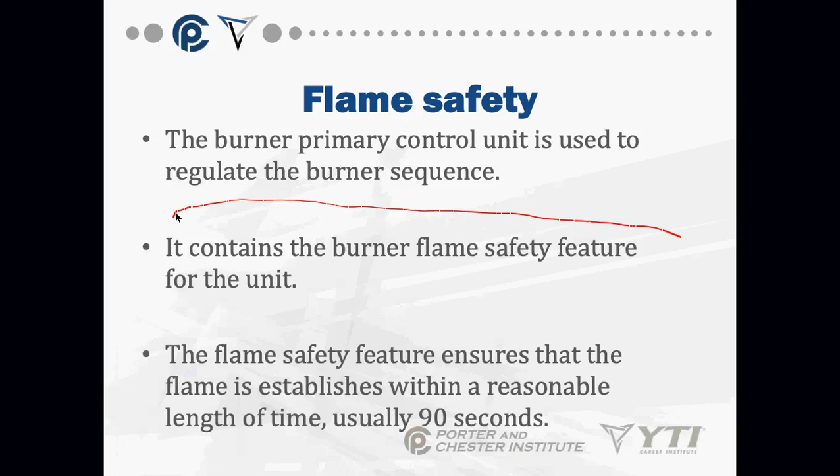But primarily, that's its operating control side—it does the sequence of operation. Now on the other end of it, we have a burner flame safety feature. The flame safety feature ensures that the flame establishes within a reasonable length of time.

Usually that's 90 seconds in the older controls. Watch this—they've now come down, in the newer controls, as far as 30 seconds. From the point that control thinks it's supposed to have flame, it has now come down to could be only 30 seconds. We call that the trial period.

So in one unit, in one little box, and I showed you the box on our call on Thursday, we have our operating control, which is the sequencing, and we have our safety control. It senses the flame.

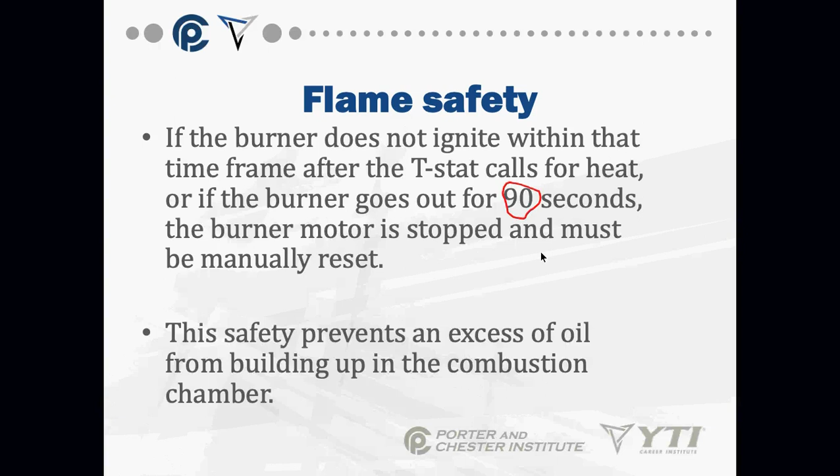If the burner doesn't ignite within the time frame after the thermostat calls for heat, or if the burner goes out for however long, 90 seconds is the max, the burner motor is stopped and the control has to be manually reset. The whole idea is that we don't have an excess of oil building up in the combustion chamber. Every time the oil burner starts with no flame, I'm spraying unused oil into that combustion chamber. If it's 90 seconds, I'm spraying 90 seconds of oil into that combustion chamber. It may not sound like a lot, but if it starts up after you've done this 5 or 6 times, it's going to be a big bang with lots of smoke. So we don't want unburned fuel building up.

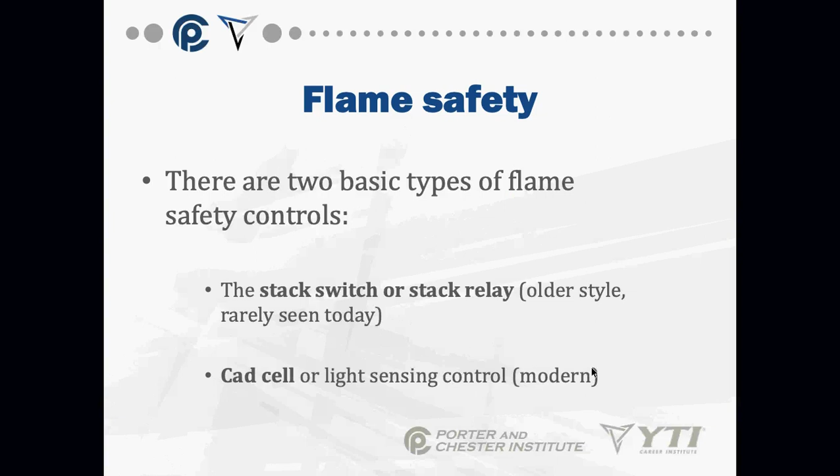We have two types of flame safety controls: the stack switch, or the stack relay. Folks, the only reason I still cover stack switch and stack relay in this course is it's on the oil burner licensing exams in both Massachusetts and Connecticut. I don't think I have any Pennsylvania on this call, but it's on the licensing exam in both Connecticut and Massachusetts.

They still talk about the stack switch, so just be very aware of this—you might come across them. You can no longer install them, and we replace them with the Cad Cell whenever we possibly can.

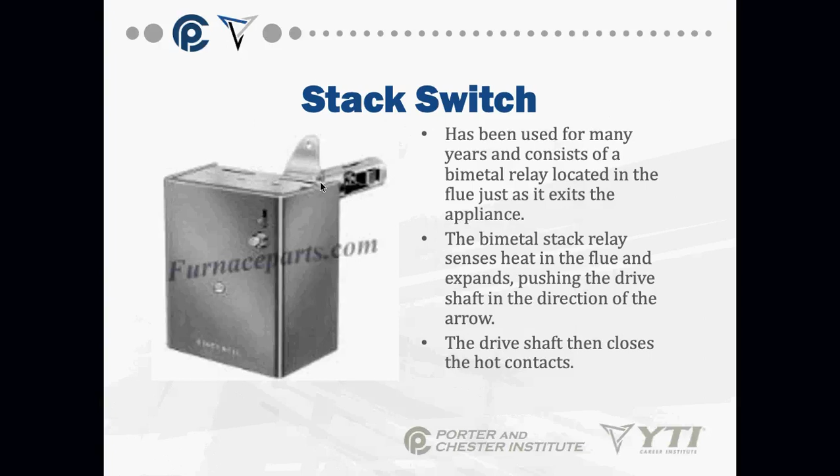The stack switch is an older style control. It looks like this. The stack switch is mounted on the furnace exhaust, the stack. This side here that I'm circling is outside of the stack—it's in the room air. It has a reset button on it, and a little lever on it.

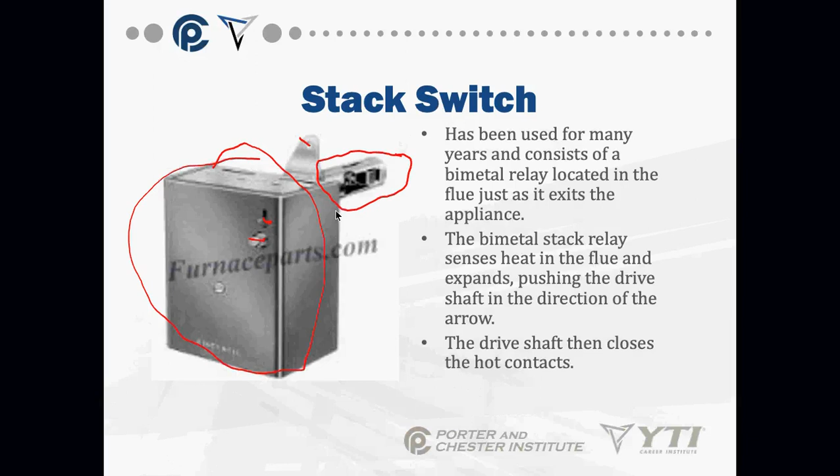And this part in the back here is what's in the flue pipe, mounted by screws right there, and there's one down further as well. It has been in use for many years—this was the first automated control we had on oil furnaces.

When they first started blowing up in New York City because of unburned oil, they decided to go with this automated control, and it works. It has a piece of bimetal in here. Bimetal is metal that expands and contracts based on heat. It senses the heat in the flue pipe and expands, pushing a drive shaft in. The shaft then closes the hot contacts—I'll show this to you on a diagram afterwards. So all this is a set of contacts with a bimetal switch in here.

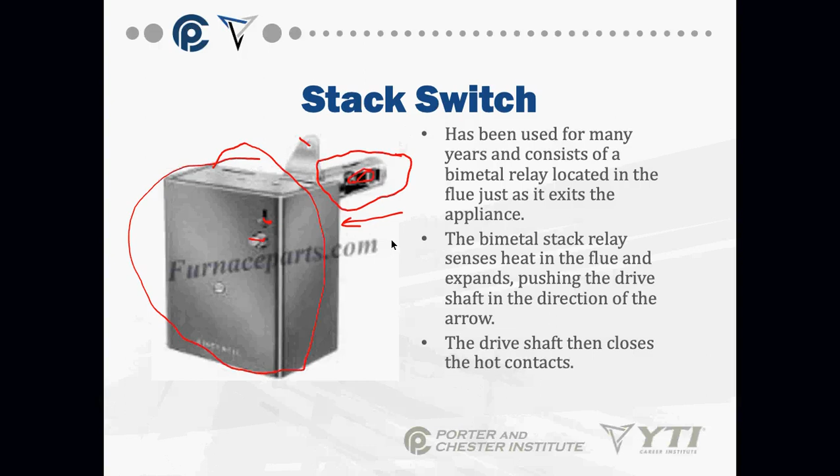If there's no ignition and consequently no heat, we have what's called a safety switch heater. Remember I talked about bypass when we were talking about circuits? If there's no ignition and no heat, there's a little heater in there that remains in the circuit and it's not bypassed. This heater heats up and opens a safety switch based on the heat, and it shuts everything down. To start the cycle again, you must manually shut off the system, depress the reset button, and it starts all over again.

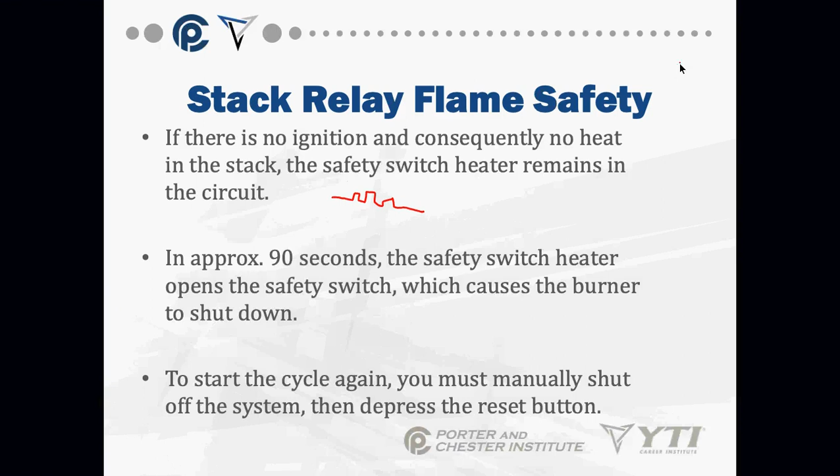Now, is the stack switch a very fast safety, or is it a slow safety in the grand scheme of things? It's slower, and it's designed to be slower because I have to have heat in the stack, in the output of the furnace, in the exhaust, before I can even sense that there's flame. It's a slower safety.

Which is part of the reason it's going away—it's not accurate enough for the newer burners. Also, a lot of the newer equipment doesn't necessarily have such a high stack temperature. Think about it: heat going up the chimney is wasted heat. It could be coming into the house and heating the house instead. So we keep our stack temperatures lower now.

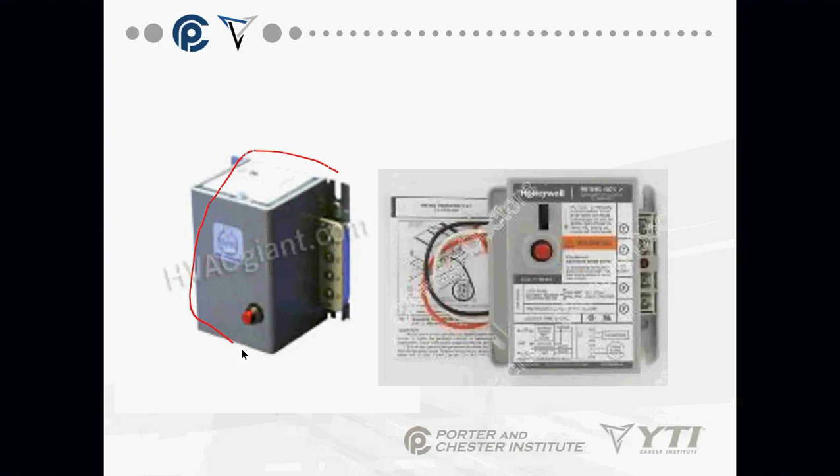Our other type of safety is the Cad Cell Relay—the Cad Cell primary control. It looks like that, or it could look like the black one that I showed you on the screen the other day. These are all different types. It's flat and mounted onto the burner assembly itself, usually on the right side of the burner where the wiring compartment is, and everything connects into this.

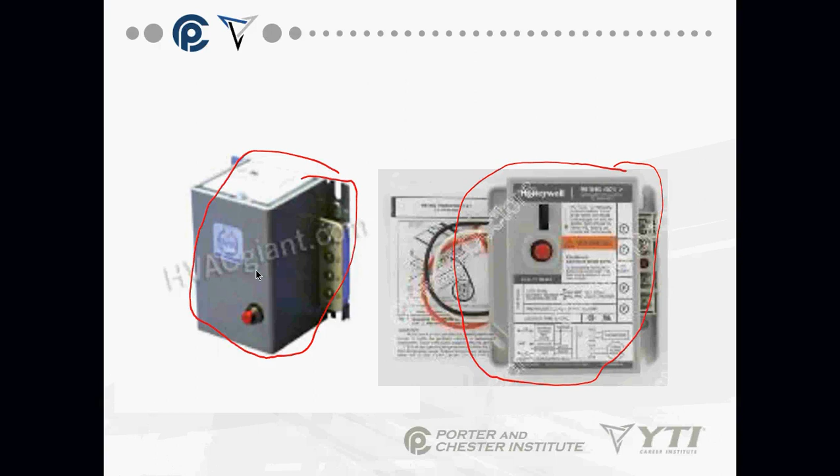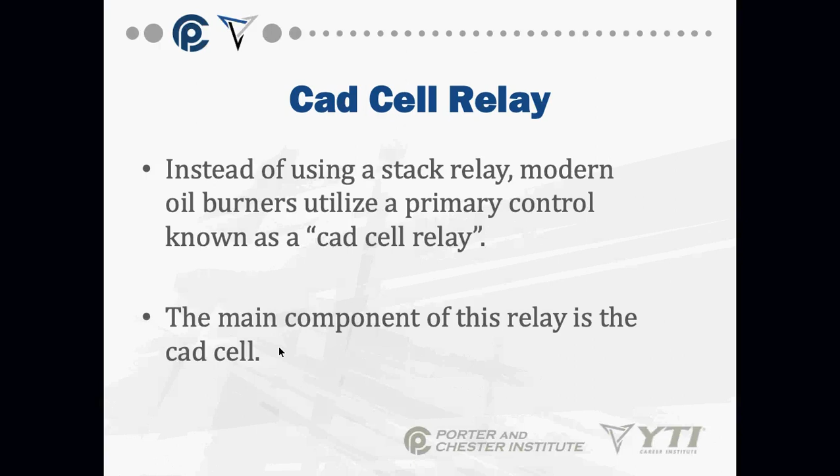The Cad Cell Relay, instead of using the stack relay, it's called a Cad Cell. The main component of this relay is the Cad Cell itself—everything else is based on it. The Cad Cell is made from a chemical compound called cadmium sulfide, and it's a substance that changes its resistance when exposed to light.

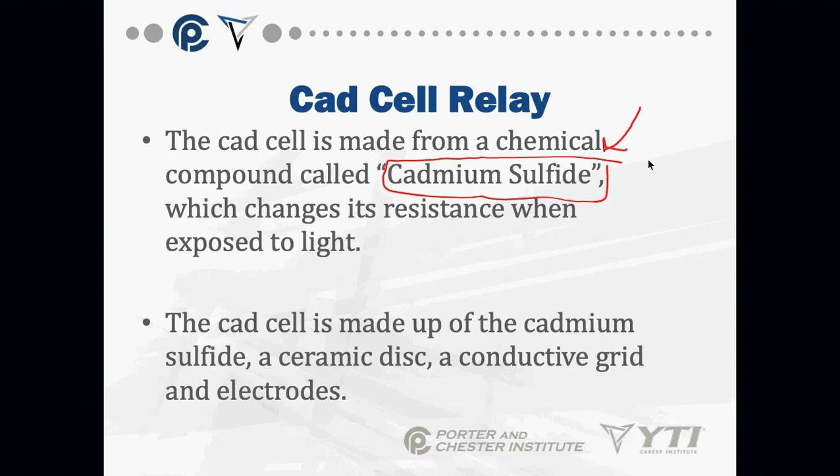This is actually mounted inside the burner tube, aimed down the tube towards the flame, so until there's flame, it sits in the dark. It's made up of a combination of cadmium sulfide, a small ceramic disc, and a conductive grid and electrodes. You don't break these things apart—I don't care what's inside it, but I do need you to know what it's made out of. Again, it changes resistance when exposed to light.

The Cad Cell has to be positioned in the oil burner so it can sense the light produced by the flame. It looks down the tube from the control side, usually mounted on the underside of the transformer, so that when the transformer's on top of the igniters, the Cad Cell looks down the tube towards the flame. The only light it's supposed to see is the light produced by the flame.

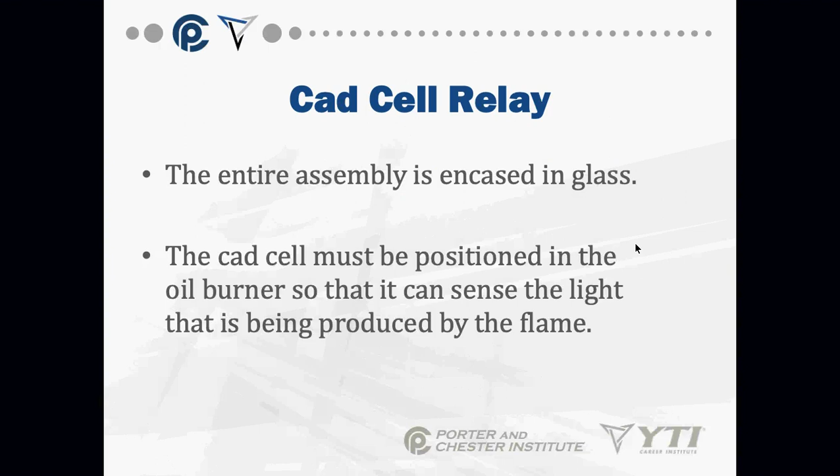When the oil burner's off, there's no light being generated, so the resistance of the Cad Cell is very high—about 100,000 ohms, and it's very possible your meter could read OL. If you take the resistance across a Cad Cell in the dark, your meter might read 100,000 ohms or close to it, or read OL. When the burner is firing and the Cad Cell sees light, the resistance drops down to under 1,000 ohms.

When you're testing a Cad Cell, this is exactly what you're testing. Cad Cells go bad over time—they only last about 3 to 4 years. They do wear out, and you've got to be able to test them and make sure they're still good. It's a source of service calls.

Now, remember I talked about the bypass circuit again—you have a heater in here that's actually going to pop a safety switch open. That heater heats up as long as the Cad Cell is in the dark. I have the Cad Cell here, which is basically a variable resistor.

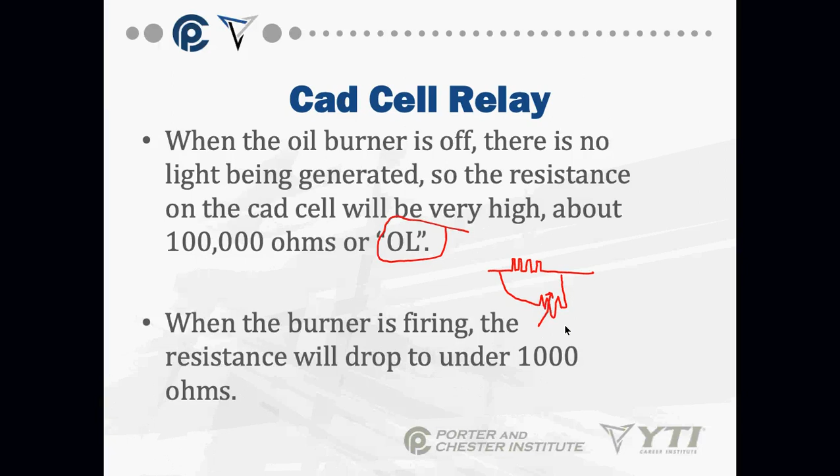Okay, pardon my drawing of a variable resistor, but it's a resistor with an arrow through it. When that Cad cell drops its resistance, it's actually a lower resistance than that heater, so we won't pop the safety switch that's being heated up by that heater. So we have a situation—this is a use of a bypass circuit. Everyone was wondering why I was so insistent we talked about bypass circuits. This is why. The voltage is going to take the path of least resistance in this control.

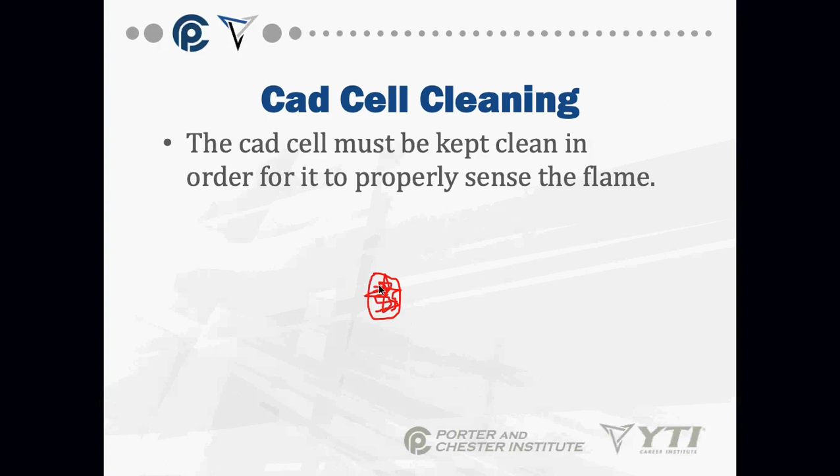Cad cells have to be clean. So if we have a lot of soot in the furnace, you have that Cad cell eye. If I'm looking straight at the Cad cell, we have resistance, we have some grids in here. You can look at the eye and you'll be able to see that. If this is all sooted up to the point it can't see the flame anymore, or it's a very dim flame, the Cad cell isn't going to work. So we want to be able to see the eye of the Cad cell. This is basically what it looks like.

We have two electrodes that provide our connectivity. We have a conductive grid, and we have the cadmium sulfide. When I put a meter across the back part of this, the two pins that are coming out of it, if my Cad cell is in the dark, or if I have it covered with a piece of electrical tape, my meter is going to read OL, or it's going to read very close to 100,000 ohms. No current is going to pass through that—it's all going to go through the heater.

Now, if I put this in the light, that number will change to a number under 1,000 ohms—it comes pretty far under 1,000 ohms. So again, Cad cell in the light, low resistance. Cad cell in the dark, very high resistance. You have to remember that. That's a memorization thing. Got to remember this. Any questions on that? No, sir. Nope. Okay.

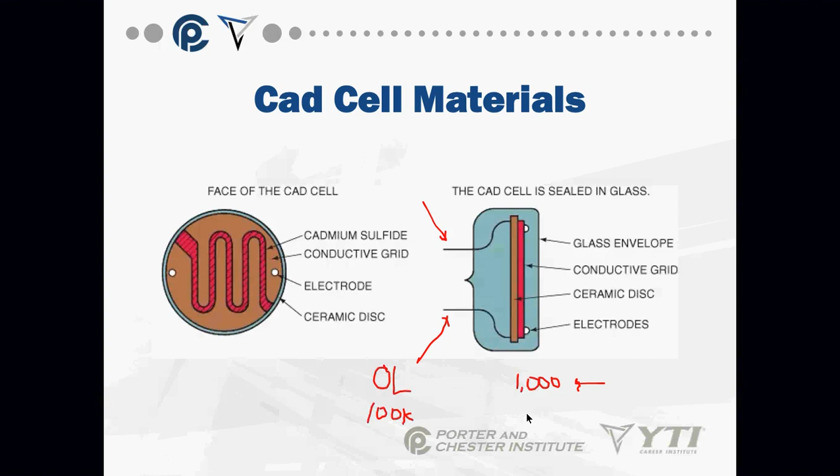So when we look at an oil burner, sometimes you have the Cad cell mounted on the back of the burner here, almost directly under the transformer. Sometimes it's actually mounted on the bottom of the transformer looking down here. The whole purpose of the Cad cell position is that it has to be able to stare down this burner tube, and it has to be able to see the flame.

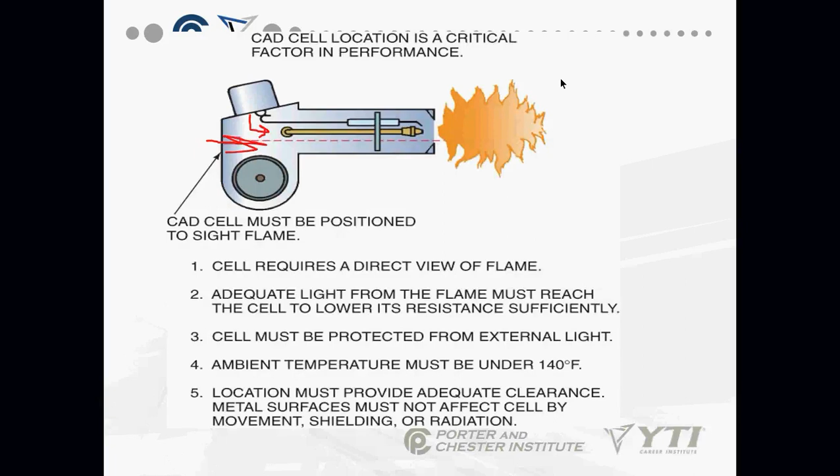The cell has to be protected from external light. When you have an oil furnace, anything that this burner's in has to be completely dark—no external light. This area has to be sealed. There's gaskets around here. No external light. Everything around this has to be sealed.

This Cad cell cannot be heated over 140 degrees, so again, this burner has to be throwing sufficient air down this tube to keep that Cad cell cool. It has to be away from metal so that we can't have movement. We can't have shielding from the light, and we can't have any infrared radiation hitting this Cad cell. It has to be able to see the light but not be affected by the heat. Placement of this Cad cell is extremely important.

Again, these things fall loose over time. There's a little bit of vibration in all oil equipment. Things get loose.

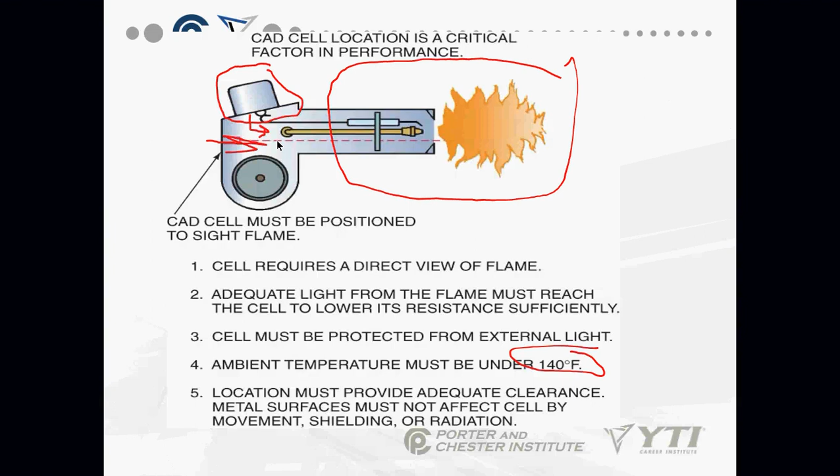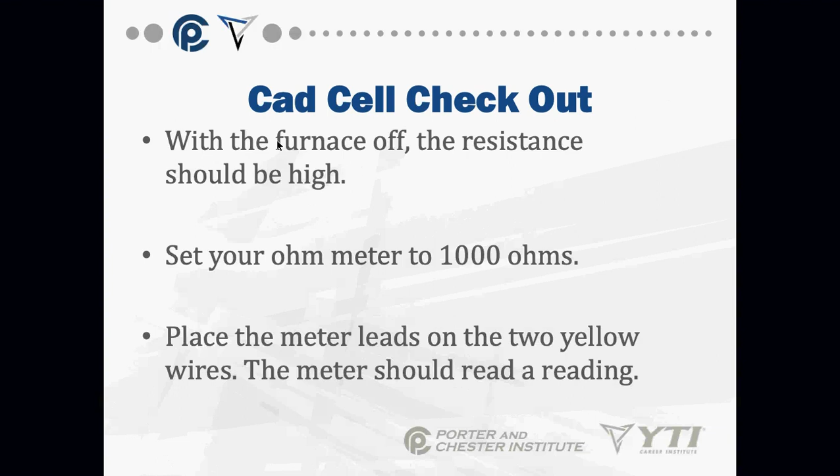With the furnace off, we take the two leads off the Cad cell, and I'll show you where it's connected. We take the resistance—the ohm meter should take a reading way over 100,000 ohms. You don't have to worry about this step anymore; this was before we had auto-ranging meters. You used to have a different scale. Your meter's all auto range now, but we wanted to set our meters for the 1K ohm scale. You don't have to worry about that step anymore.

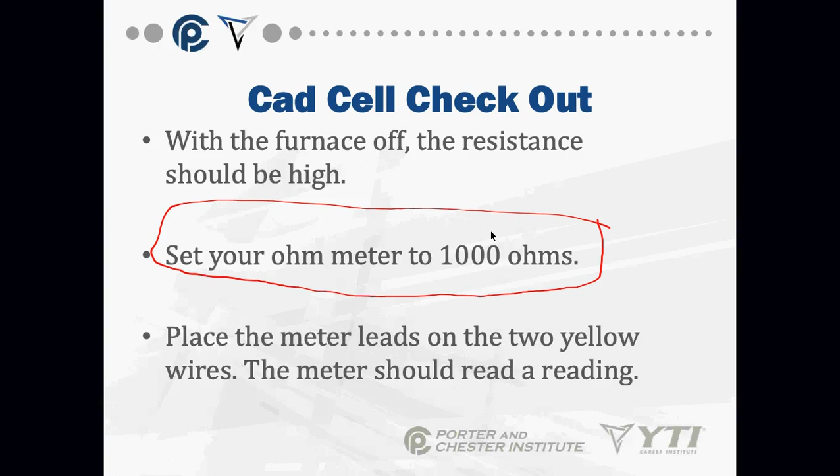You place the meter leads on the two yellow wires. The meter should read a reading. Now, we jump out the T and T terminals, and I'll show you where that is—that's basically where your thermostat connects into.

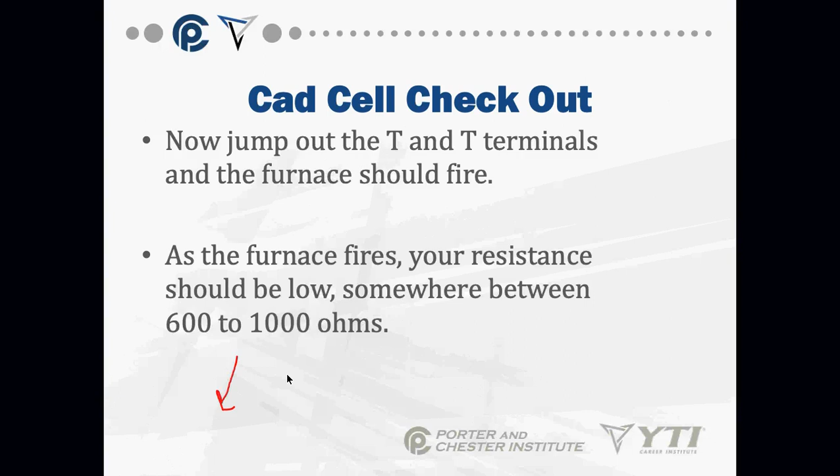The furnace should start up. After the furnace fires, the resistance should be low, somewhere between 600 to 1,000 ohms. Quite honestly, most often now it falls under that. But anywhere from 600 to 1,000 ohms or lower, you're fine. That CAD cell is perfect.

If the CAD cell is good, the CAD cell is good if all of this happens. If it doesn't happen, replace it. You can't fix a CAD cell. The CAD cell is preferred over the internal stack switch. It acts faster, has no mechanical moving parts, and is much more dependable.

Okay, so CAD cell is what we're using. It senses light. As it senses light, the resistance drops. It's a stupid little $2.50 part that is the heart of the entire oil safety controls on every single furnace.

Okay, I want to talk one more about it, but it's going to be on a separate PowerPoint. So just give me a second and I'll switch over. Any questions on what I've covered already? No, sir. Okay.

This is the picture of the CAD cell that's actually mounted on the bottom of the oil furnace. Okay, didn't want that.

You see that this is my transformer. We have the springs of the transformer, and then we have the CAD cell positioned between the two springs of the transformer. This CAD cell, where it's mounted, actually slides in and out. This whole CAD cell assembly will slide out. You don't have to take any screws off or anything like that. It slides out.

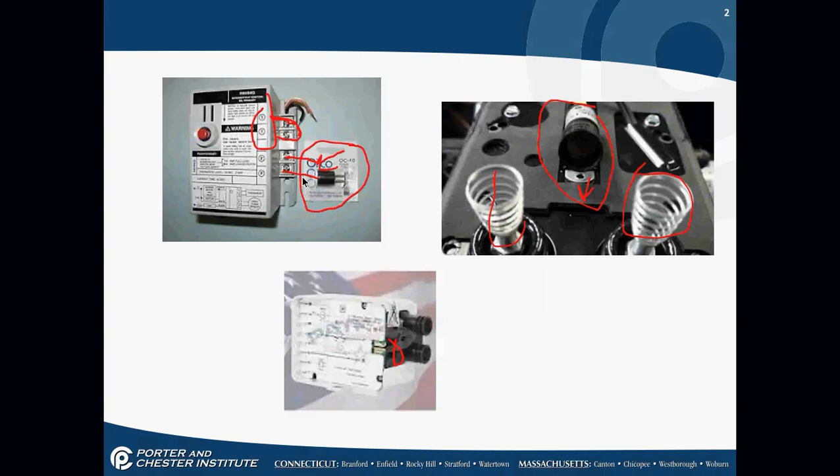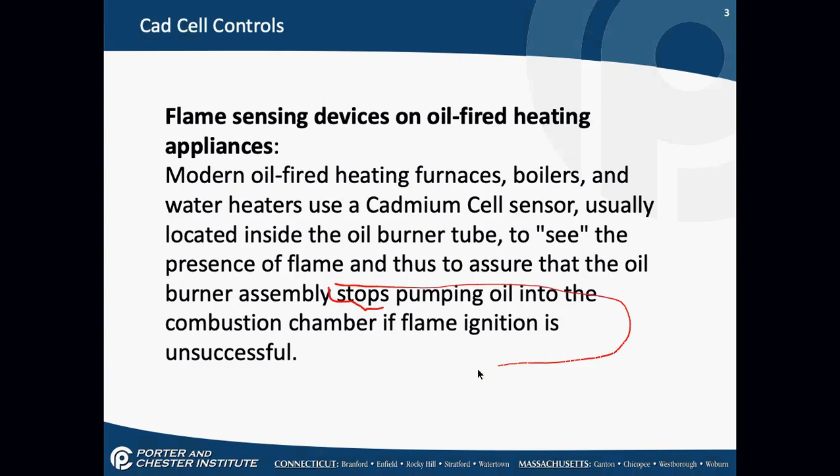Okay, so again, it's a flame sensing device. We've already gone over this. Again, it has to be able to see, through the tube, the presence of flame. It stops pumping oil into the combustion chamber. I've said it twice now. It's pretty important - it's got to stop pumping oil into the combustion chamber if the flame goes out.

Okay, yellow wires, that's the key. Yellow wires. Okay?

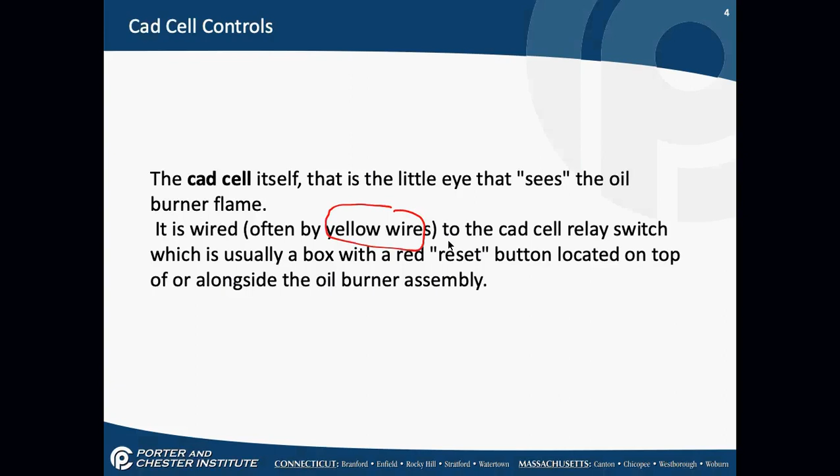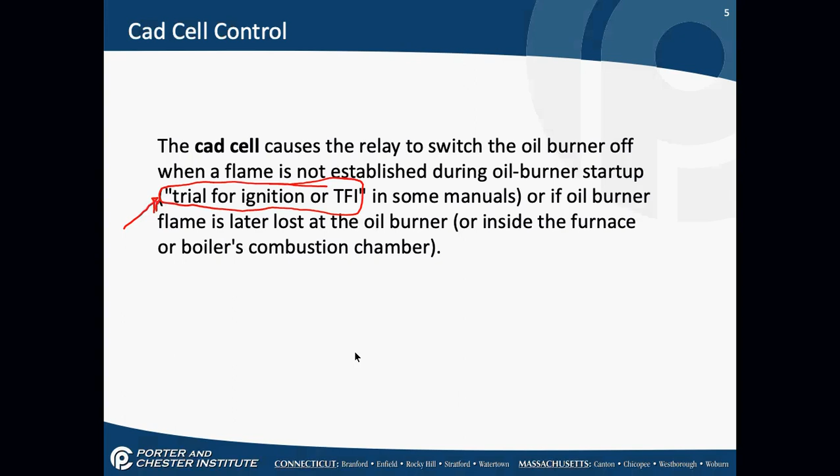Trial for ignition is a term you're going to see quite a bit. Not going to read all these slides, but trial for ignition basically says, let's make sure we have flame, let's make sure we keep flame, let's make sure I'm burning all the oil that's going in there. We don't have a pilot light. If there's extra oil going in, I don't have the luxury like I do on a gas furnace of having a pilot light that will burn the excess. I have to know that the oil is actually being used for something.

Somewhere underneath. There was someone else who said something in the background. What was that? You have to hold a button for like 3 seconds or something?

Well, both are actually correct answers. Underneath, there is a button. It's not just 3 seconds, you actually have to hold it down for 90 seconds. But who in here has had gas heat already? How do you reset a gas furnace?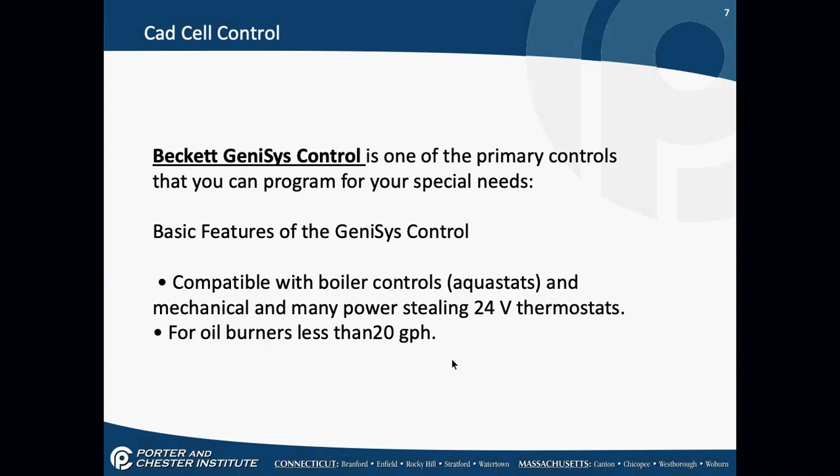Okay, the basic system, this is the Beckett GeniSys control. It's compatible with all types of controls. Can be compatible with boiler, can be compatible with power stealing 24-volt thermostats, in other words, thermostats without a common. But they're designed for oil burners with less than 20 gallons per hour.

Again, they do have a maximum size limit, and that's because of code. They cannot be used on oil burners that burn more than 20 gallons per hour. Now let's think about that. How many BTUs does a gallon of oil burn?

Come on, folks, how many people? 140,000? 100 and... I thought it was 14,000. No, it's 100... it has a range, so you're okay on that. But could it be between 130 and 140,000? Yeah, yes.

Okay, so think about 20 gallons per hour. Where would you see an oil burner of that size? Industrial, commercial or something. It's going to be mainly industrial, where we're using oil heat to do a process. Could be in a very large office building. But an oil burner of that size, you're not going to want to stand next to it when it fires up.

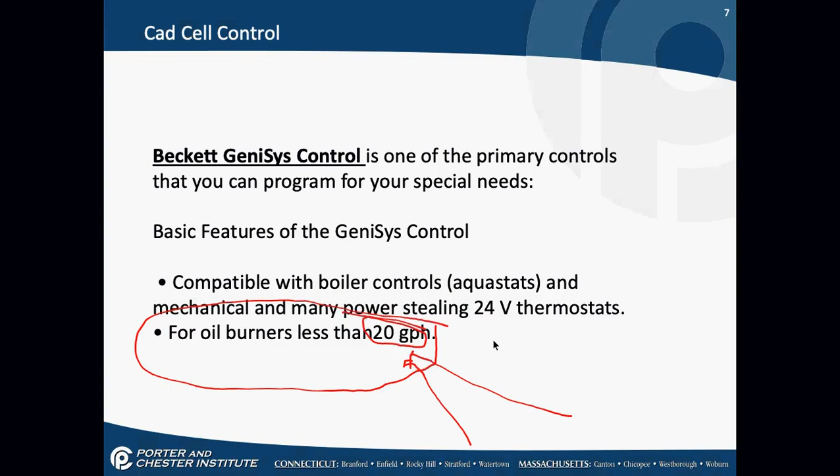So again, these controls we're talking about are under 20 gallons per hour. Limited resets basically means recurring lockouts without a complete heat cycle, which puts a control into a restricted or hard lockout mode. It allows you to have a limited recycle. If a flame is established and then lost, the control will recycle until a cumulative time trial for ignition is exhausted, and then it goes into a hard lockout.

So again, what do we mean by a complete heat cycle? What does a control see with a complete heat cycle? Combustion. It sees combustion, air. But how does my control know that I've had a complete heating cycle? Through the Cad Cell? Well, remember those two terminals I told you, T and T, that my thermostat connects into?

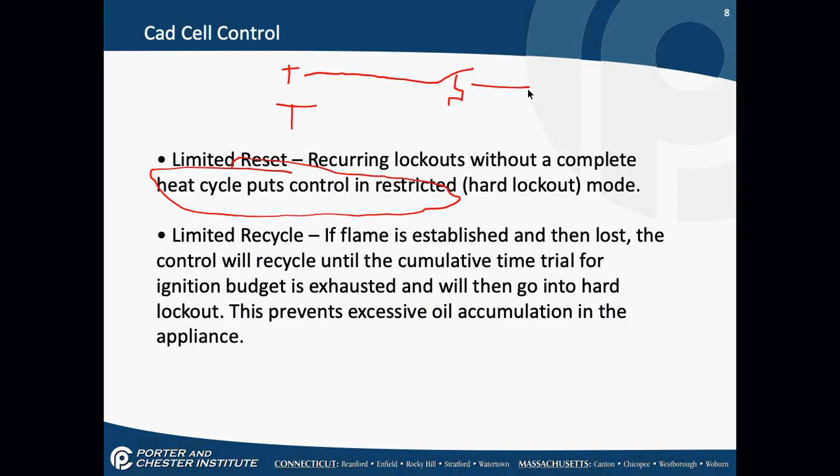So if I have a complete heat cycle, my thermostat calls for heat, closes T and T, my burner runs, but then at the end of the heat cycle, my thermostat is going to open and it's going to shut off the burner. So basically my control knows a complete heat cycle happens when T and T is no longer closed. I've had ignition, I've had flame, and I no longer have flame because T and T is open.

Recycle. Since no one's going to ask me what recycle means, it basically means it's going to try to ignite up to whatever my cumulative time trial is. So if my control is a 90-second control, my ignition control is going to attempt to relight the oil until it reaches a total of 90 seconds. So it's going to try to recycle on its own, redo itself, try to bring that oil back on. Let's say there was a little bit of air in the line, which we'll talk about further as we move forward. But this control is going to try to reset itself a number of times until it reaches whatever my total time allowed is.

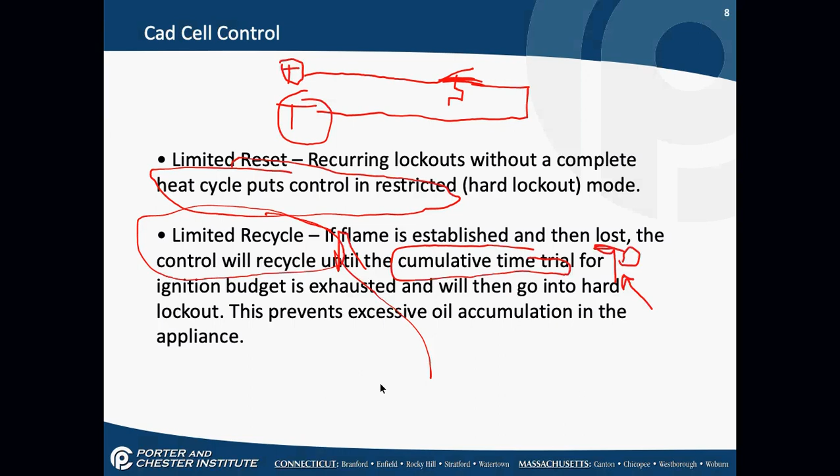The computerized control keeps track. Even if you turn power off, it still keeps track. It has a display on some of them where you have a contractor tool, where you can plug another control, something you carry with you as a contractor, into the control on top of the furnace, and you get much more of a display than what the customer gets. It gives you additional programming options, troubleshooting options. It will tell you the resistance of the CAD cell in the system, so you don't have to take your meter out or unscrew wires. It will give all of that for you on the contractor tool. So there's a lot of computerized stuff in this.

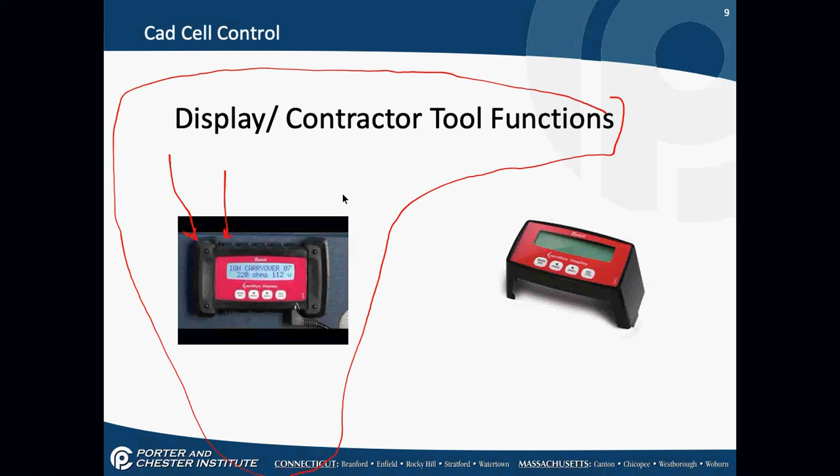It's Beckett's goal that eventually this control is going to be internet driven, where you'll be able to automatically get a notification as a contractor that someone's oil burner is having problems before they even know they're having problems. So the whole goal is to get to an advanced repair situation.

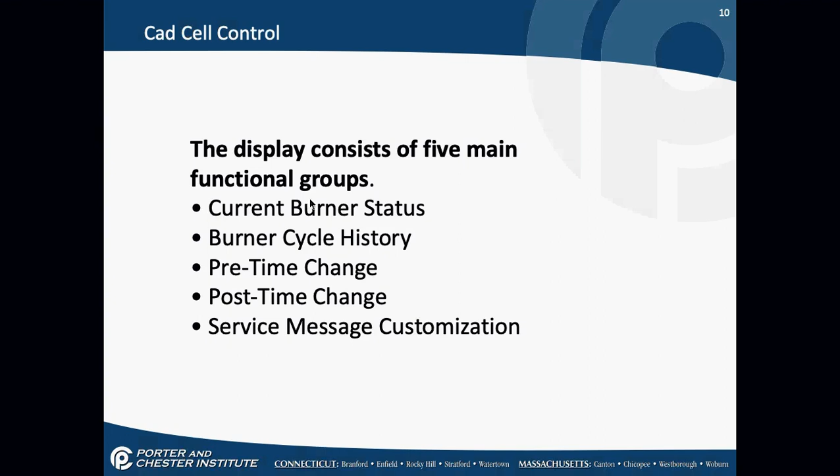The display has 5 main functional groups: current burner status, burner cycle history, pre-time change, post-time change, and service message customization. Pre-time means how long it's going to keep the burner motor running before it allows oil in, in other words, how long we're going to blow air through the system before we start the ignition sequence. The post-time means how long after the flame goes out are we going to blow air through the combustion chamber. Burner cycle history just shows us the history of the lockouts, history of the call for heat, history of everything that has happened, usually within the last 7 days.

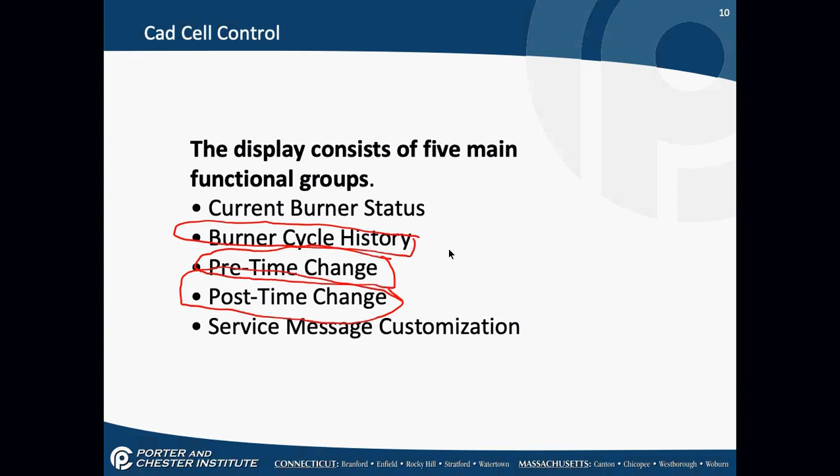It keeps that much history, so I can cycle back and see what the calls for heat were, how many times someone has been able to reset it, what's happened to it. Current burner status gives me all my information about whether it's running, even though I should be able to see that, what the resistance of the CAD cell is, what the resistance and status of the solenoid valve on the oil line is, gives me all of that.

Some of them are even giving pump pressures now. Service message customization basically means what is displayed to the customer if it needs a service call, if it locks out. Do we put in the contractor's phone number right there? In other words, your system has a problem, call this number. So service message customization, what do we want the customer to see?

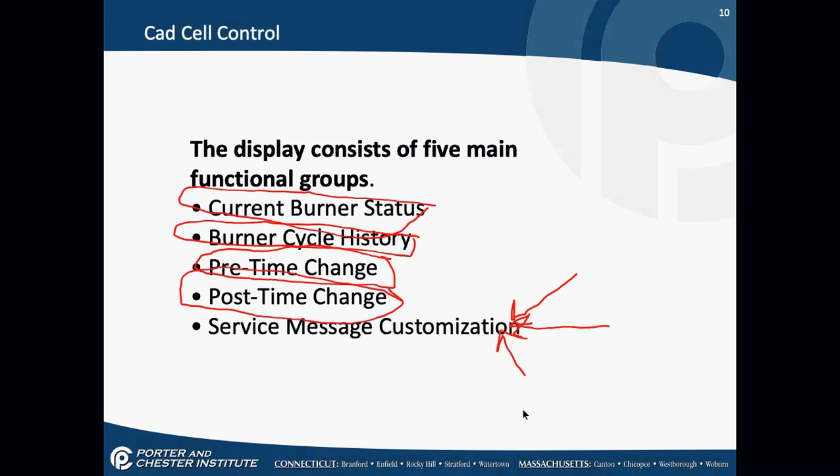All of this is programmable in these newer controls, but it still has the same basic functionality. It is an operating control and it is a safety. And again, the yellow wires on an oil furnace always lead to the CAD cell, unless somebody has changed wires out, and they really shouldn't. But the yellow wires lead to the CAD cells.

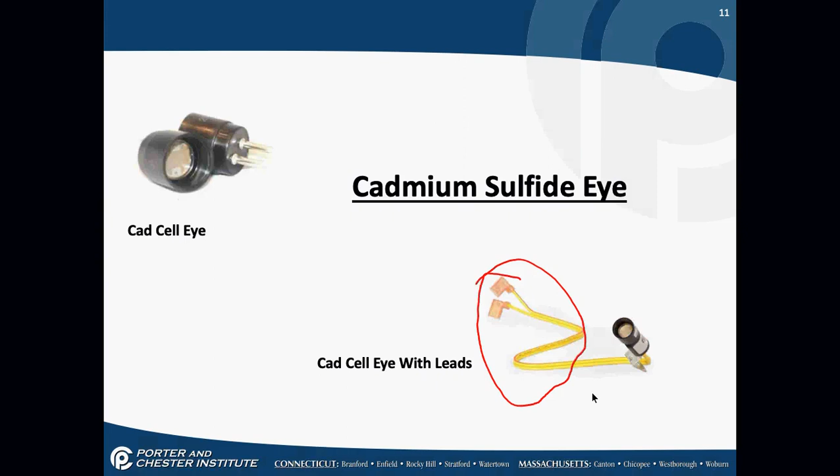Now, 15 to 20 seconds is some of our newer controls. That control I just showed you, 15 to 20 seconds, is how long the burner will run without seeing light when there's supposed to be flame. Very, very fast.

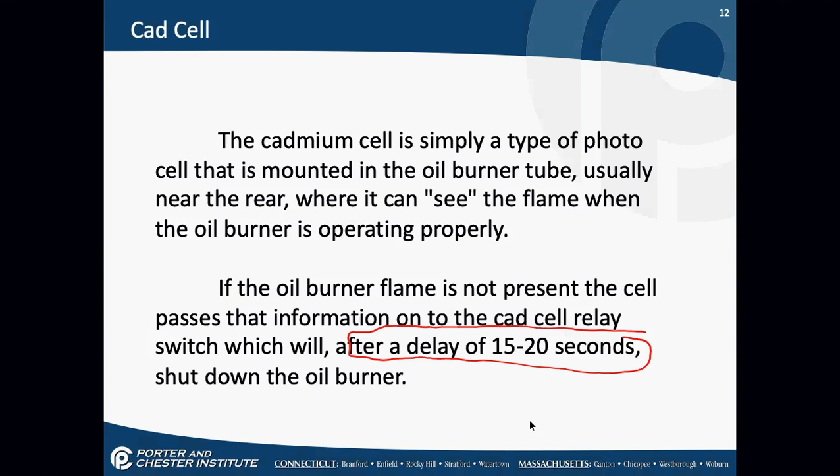Again, we've talked about this. If it becomes coated with soot, it won't see the light. It's going to shut down the burner, it's going to cause random lockouts. Should there ever be soot in a combustion chamber? No, not really. You might have a little tiny bit on startup and shutdown, but there really shouldn't be soot. If these burners are adjusted properly, they should be burning relatively clean.

Excessive soot on a CAD cell, I know I have more problems than just having a blocked CAD cell. I could clean the CAD cell, the burner might run, but you better believe if I see soot on the CAD cell, I'm going to go investigate further because you're going to get a call back. What did I tell you is the most often improperly adjusted thing on an oil furnace?

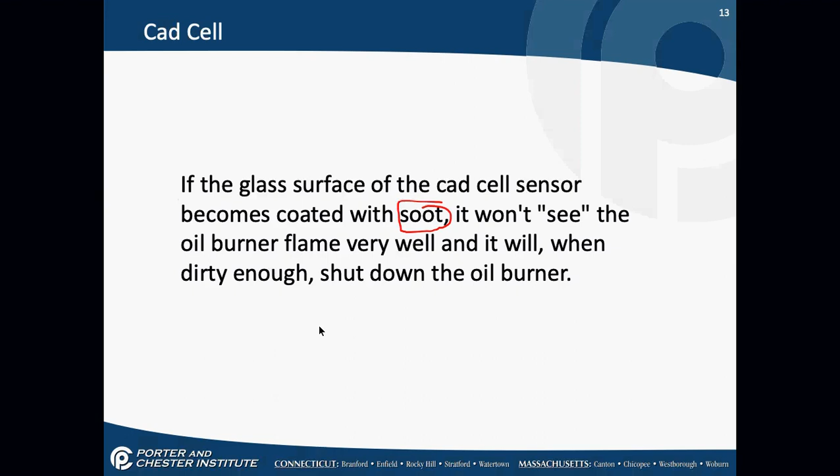Technicians hate to adjust this because it's such a pain - the nozzle assembly, primarily those electrodes. Takes like 4 hands to adjust them, and you only have 2. Those electrodes are the biggest issue with the oil burners, and if they're not adjusted properly, you're going to have soot.

If there's a red reset button on the CAD Cell Relay and it's up, and the oil burner is shut down, we want to allow the homeowner to try once to reset the system. Now, some of the CAD cells let them reset it more than once, up to 3 times. One of the first questions I'm going to ask the homeowner, usually as I'm adjusting their thermostat, is how many times have you hit the safety? How many times have you tried to reset it?

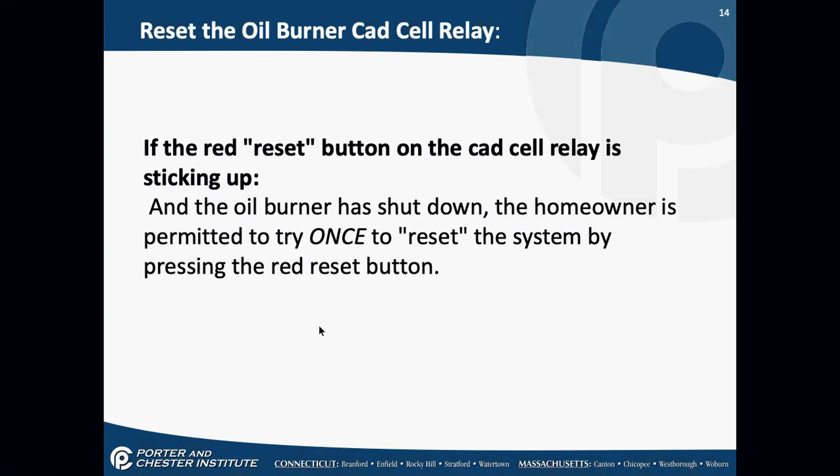Am I going to believe that homeowner? Never. No, I'm not going to believe the homeowner, ever. Even if the homeowner is my closest buddy or my grandma, I'm not believing them, because I can guarantee they've reset it more than once.

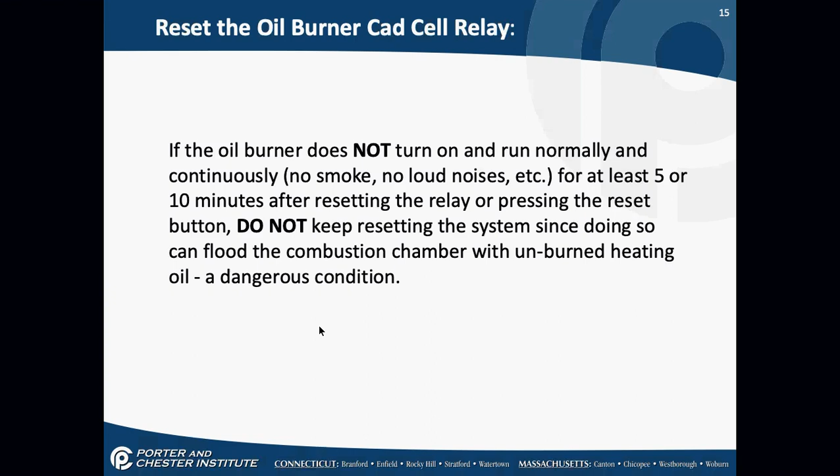If the oil burner does not turn on and run normally and continuously for at least 5 to 10 minutes after resetting the safety, do not keep resetting the system. Because doing so can flood the combustion chamber with unburned heating oil. It becomes a very dangerous condition.

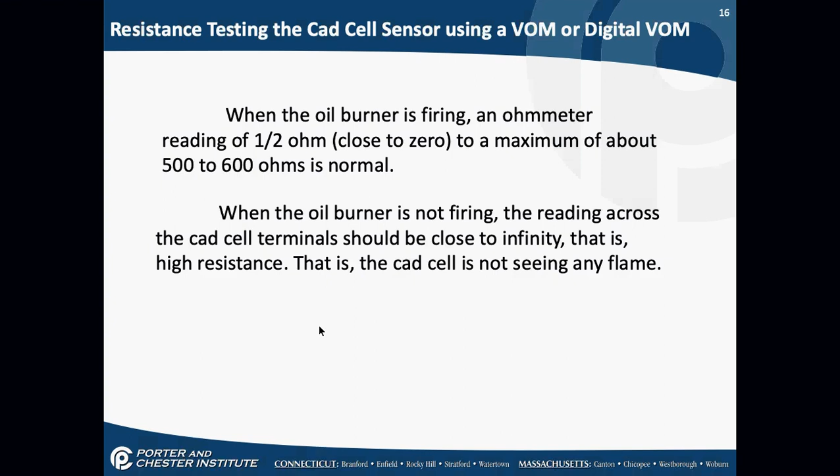When an oil burner's firing, if you put an ohm meter on the CAD cell reading, you'll read between 500 to 600 ohms. If the burner's not firing, it should be close to infinity. We've already gone over that.

An oil burner that is adjusted with excessive combustion air can sometimes produce a flame that is abnormally bright, and it can give you extremely low CAD cell readings. I don't worry too much about that side of it.

Modern oil burners with short combustion chambers produce a short flame. When the flame is burning well, it's sometimes harder for the CAD cell to see the fire. So again, it has to be positioned properly, no soot. They're pretty sensitive.

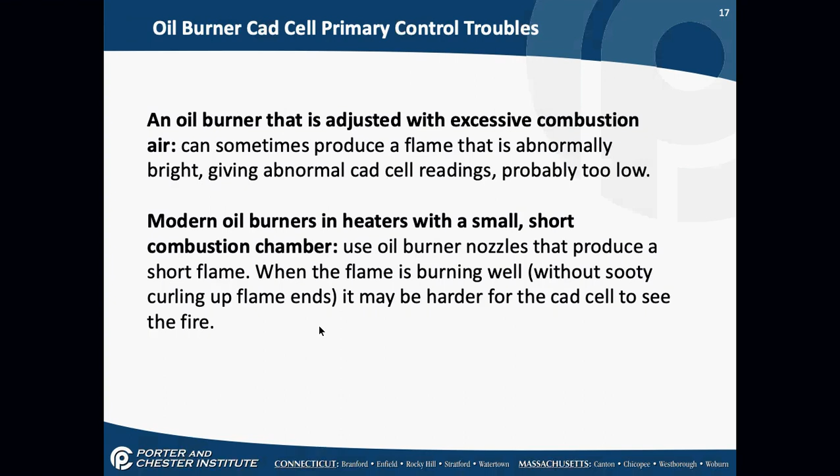An oil burner that uses a nozzle that produces a very narrow flame - remember our nozzle, we talked about this briefly, we're going to talk about this more. I might have a 90-degree nozzle, that's a pretty wide flame. I might have a 45-degree nozzle, that's a narrower flame. Again, it can sometimes have problems seeing that flame.

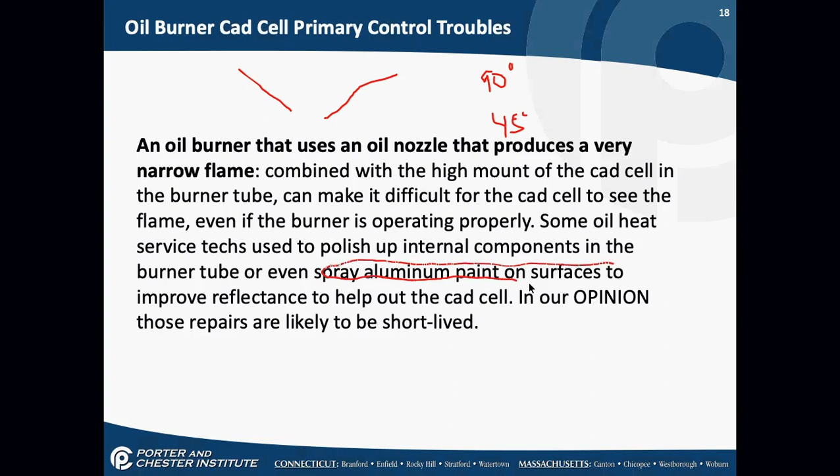Some oil service technicians try to polish up the internal components in the burner tube. I've even seen - someone pointed it out to me once - somebody spray aluminum paint onto the surfaces inside the burner tube, painted the entire inside aluminum. Those repairs are pretty short-lived. That's not the right way to do it. If they had expected the thing to need aluminum paint, do you think they would have put that in there from the factory?

If it was necessary, yes. So why should I add, or why do I even want to add aluminum paint in the field? Why would I need to do that? You wouldn't. I really shouldn't, because I'm trying to become the mechanical engineer and second guess what was done in the development and design of this system. You never want to become the mechanical engineer - that's why people get sued. Don't do it.

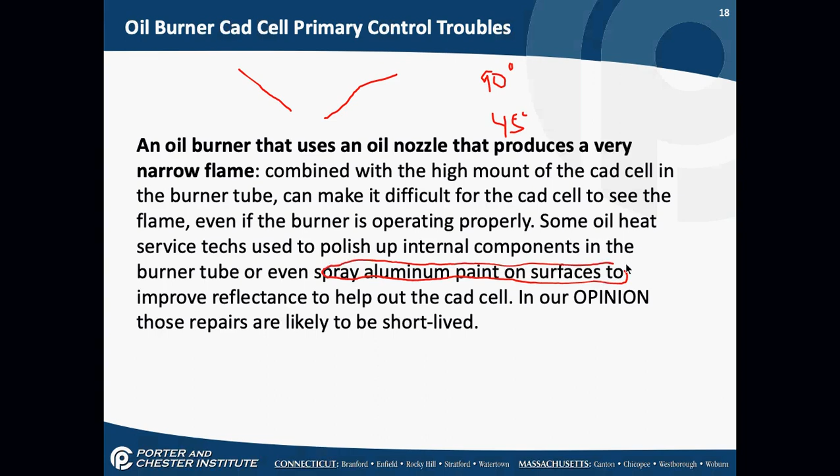An oil burner whose squirrel cage fan is dirt-clogged will not get enough combustion air. Remember, there's that little squirrel cage fan in the oil burner. The result for a while is that the CAD Cell is going to see a narrow flame pattern, but if I don't have enough air, the flame is going to become very sooty, and it's eventually going to soot up that CAD Cell eye. Not enough air is a cause for soot, guys. I want you to remember that. Not enough air will cause soot.

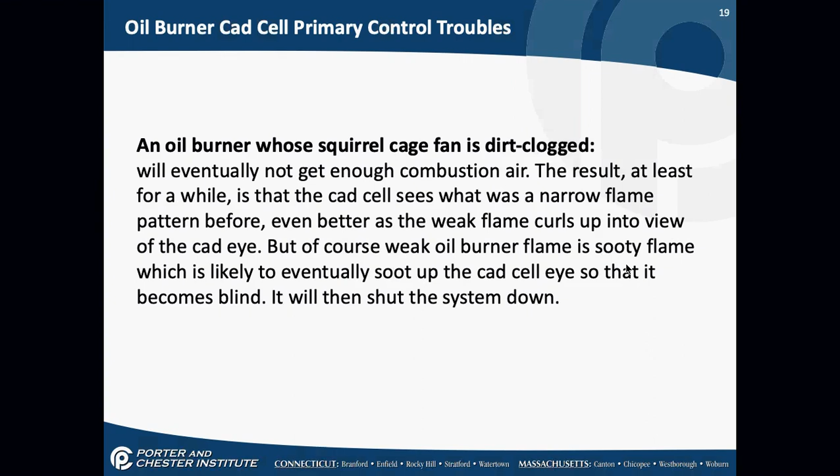All soot is unburnt fuel. Gotta have enough air to burn all the fuel in the system. Not enough air means unburnt fuel. Okay, let's take a look at a couple schematics.

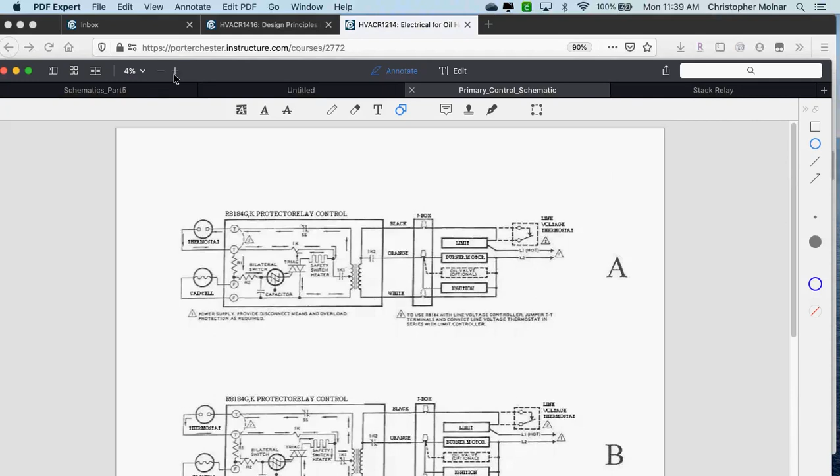Let me blow this up in size. These are in your course, by the way. This is called a primary control schematic. I think it's on today's material.

Basically, the thermostat is just calling for heat. The thermostat is connected over here to TT. It's basically just calling for heat. So we have all of our different things in here.

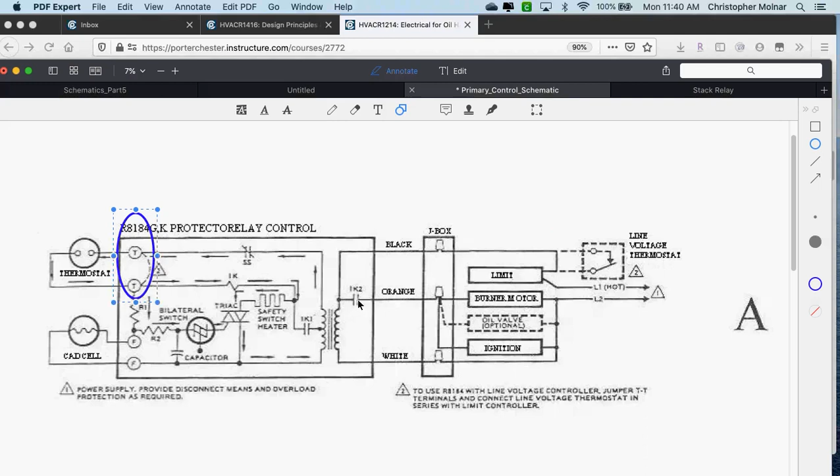The safety switch heater is what I wanted to show you right here. We have a safety switch and a heater. There's a triac in here.

Can anybody tell me what a triac is? Anybody in here had anything with electronics? Can you tell me what a triac is? I don't think I've ever heard the term.

Okay, a triac is basically a switch. It allows voltage to pass in one direction or the other. So it allows you to have basically a switch that goes in both directions, depending on where the voltage is and where it isn't.

So here we have the safety switch is closed, that's SS. We have a coil in here, it's the 1K coil. Now you see why things become so important with labeling? I have a 1K coil that I just circled. Let me get rid of some of the other circles here.

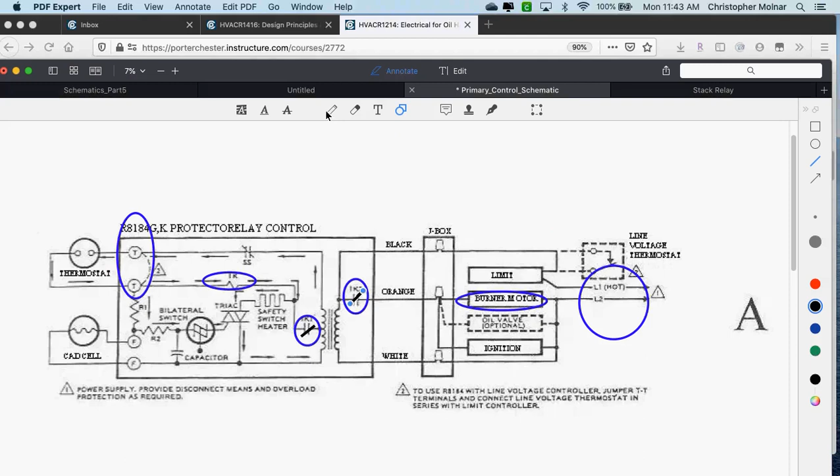This is where my safety switch heater is going to start heating up. I think that's what you're asking, because my power is flowing from here through my safety switch, through my triac, and back to my transformer.

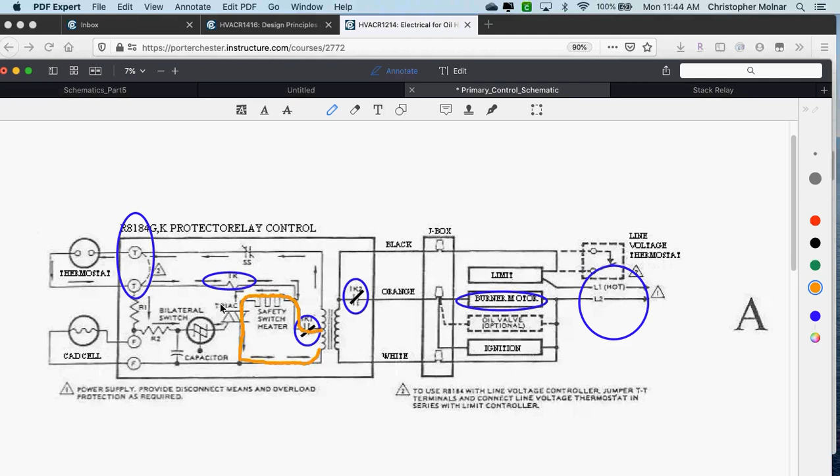So as long as my 1K1 and this triac is here. Now we also have a line going to my Cad cell, right?

Cad cell right now, because it's in the dark before the flame starts, has a very high resistance. I have very little current flow. So it all depends on the resistance and the current flow coming into this triac, whether or not my safety switch heater is still in the circuit, or if the circuit is completed by bypassing the safety switch heater.

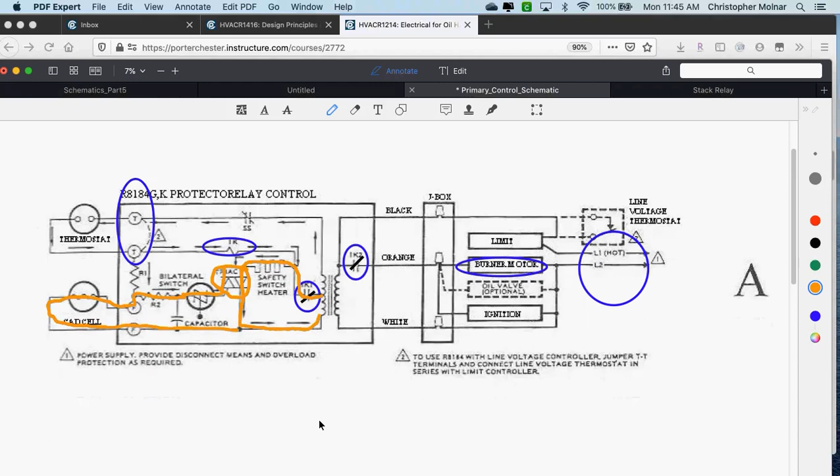We're going through the safety switch heater. All this is a piece of bimetal. As the voltage goes through here, it continues to heat up, and believe it or not, all it does is heat up enough and it pops the control out. It pops that little red button out, and it shuts everything down.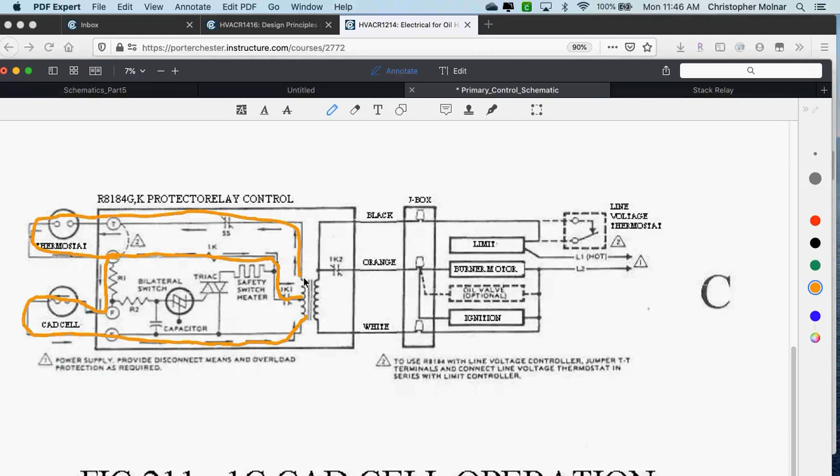Is my safety switch still in the circuit? Does anybody see the safety switch in the circuit at this point? Safety switch heater? No, sir. No, the Cad cell's bypassing it.

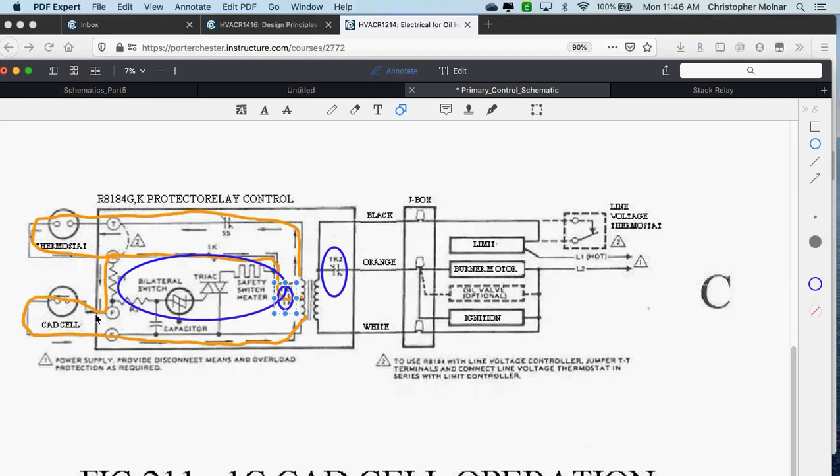All of this center point in here, okay, all of this in here is now being bypassed because the Cad cell is bypassing the power around this whole center point. I still have my burner running. I still have my center tap of my transformer available, but everything is now bypassing this entire center point because the resistance is so low of the Cad cell.

Now, if the Cad cell stops seeing light, okay, we stop the Cad cell seeing light, it's no longer seeing light. The power is going to now come through this way.

And that heater is going to start heating up again.

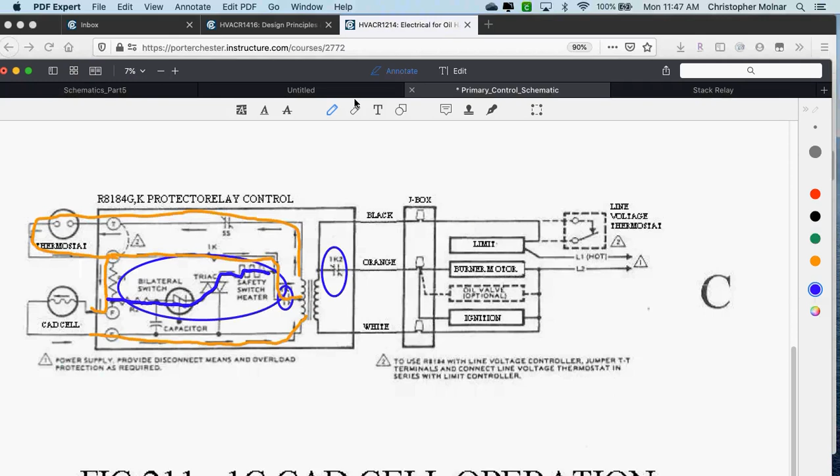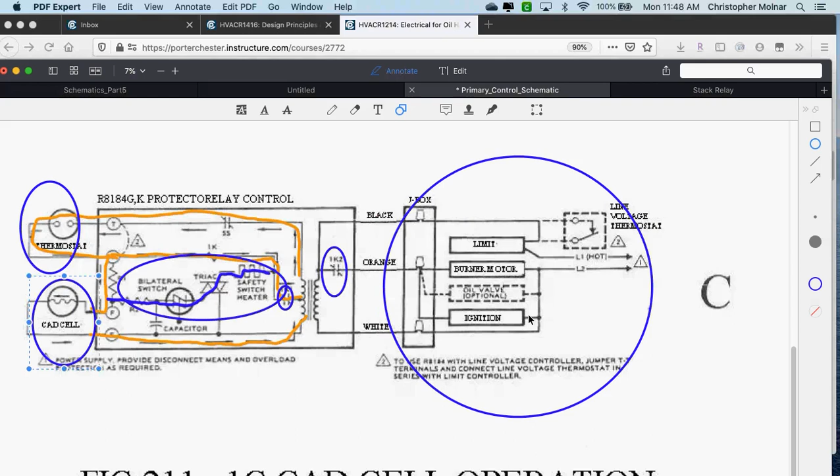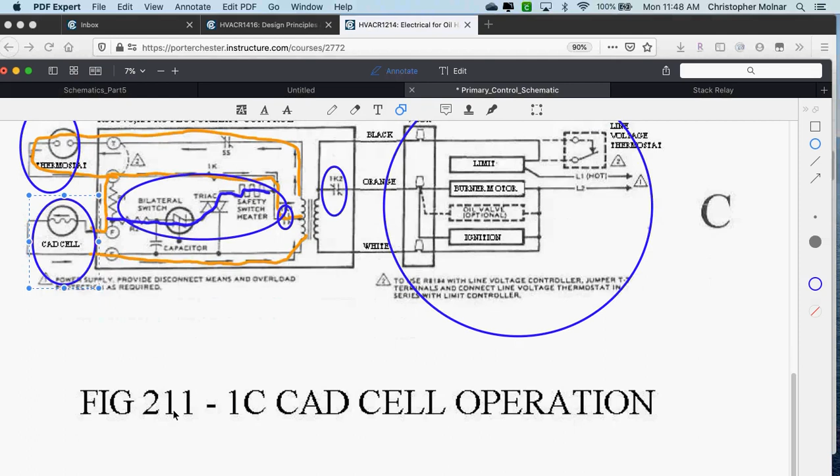Now, can I fix any of these internal components in this device? No. The only components you can fix in a CAD Cell Relay is anything on this side. Can't fix a thermostat, you're going to replace it. Can't fix a CAD cell, you're going to replace it if it goes bad. The only thing you can fix in a CAD cell is on that side. Again, you're basically not going to fix them, you're going to replace them. But anything inside this control, you do not touch. You can pop the covers off and take a look at it, but you don't touch or do anything with those inside.

Questions on CAD cells? Anything? No, sir.

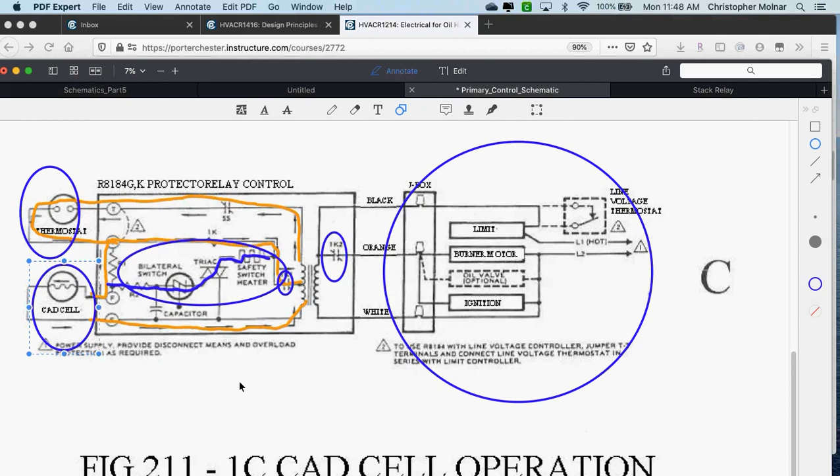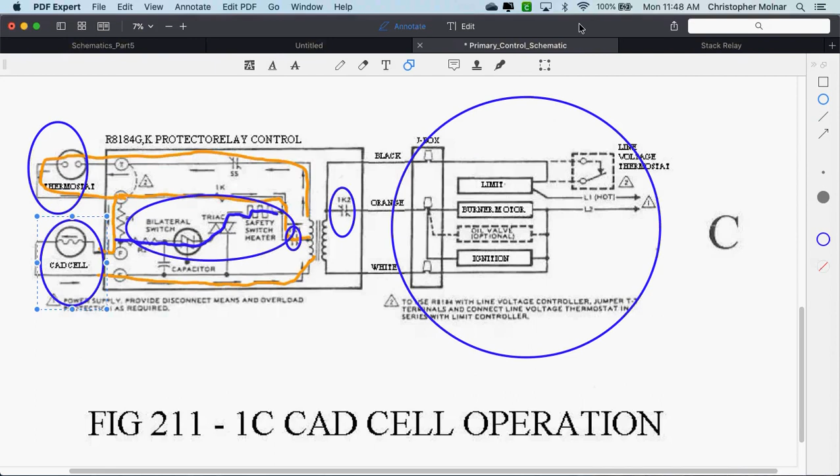So if I ask you what a CAD cell is, what are you going to tell me? It's a safety switch. It's a safety switch and a primary control, an operating control, right?

What are my good values of resistance for a CAD cell? What do I want to see? Under 1,000 ohms. When it's seeing light or when it's in the dark? When it's seeing light. Okay, what about in the dark, what do I want to see? About 100,000 ohms. Close to 100,000, or what might your meter show? OL.

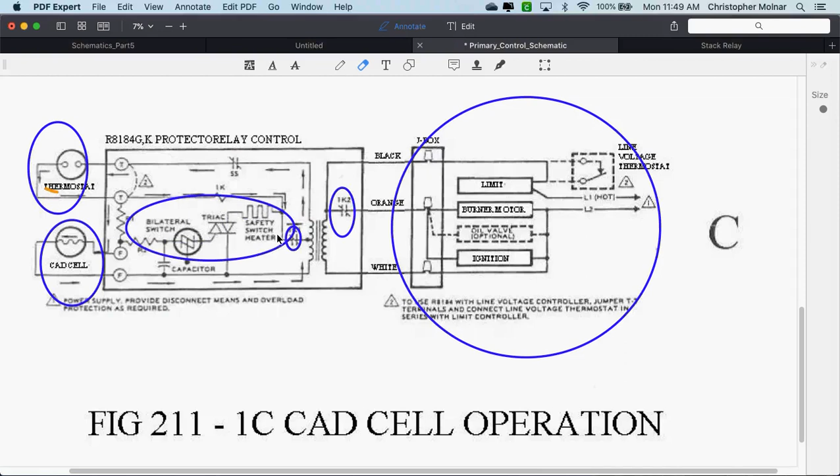Okay, now let me erase what I drew on here because there's something important I want to talk about from a troubleshooting perspective. For all things considered, this entire box is what I consider a black box. You have 4 terminals coming into it for low voltage connections, and you have however many terminals for the rest. Sometimes they break apart the igniter, the burner motor, and an oil valve. We'll talk more about that when we discuss sequencing. But basically you have 4 terminals available for you to test these things out.

Okay, what if the thermostat is not calling for heat? If I have my meter leads there and there, what should I see on my meter voltage-wise? OL? 0? The thermostat is not calling for heat, in other words it's open. What should I see? Think it through, what's the voltage across an open switch? Will it be 120? But this is not a 120 volt source, so what should I see? 24. That is correct. Across T and T, if my thermostat is not calling for heat, I should see 24 volts.

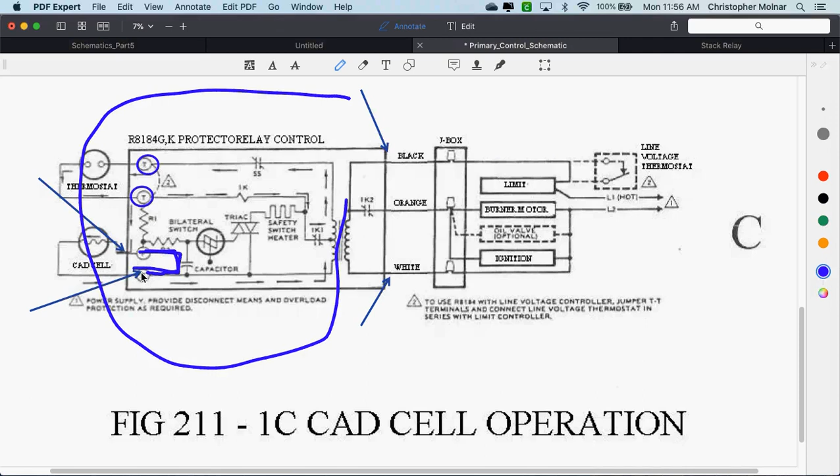That's to prevent a homeowner or a service technician from leaving FF jumped and just letting the system run. The minute we take power off here, the minute I open a service switch or the flame shuts off, if FF is jumped, I can no longer start the system. I have to take one of the leads of the jumper off, let the system start, let it go through, and then I can put the lead back on. But I cannot have FF jumped out when the Cad cell is starting up. It won't allow it.

Now, if you are taking all these meter readings, and if you have to put a jumper on while you're taking these meter readings, where's your third hand going to come from? I mean, in all seriousness, you have the Cad cell here. You're holding a meter on it to see what your Cad cell's doing. What are you going to do? How are you going to get that jumper on?

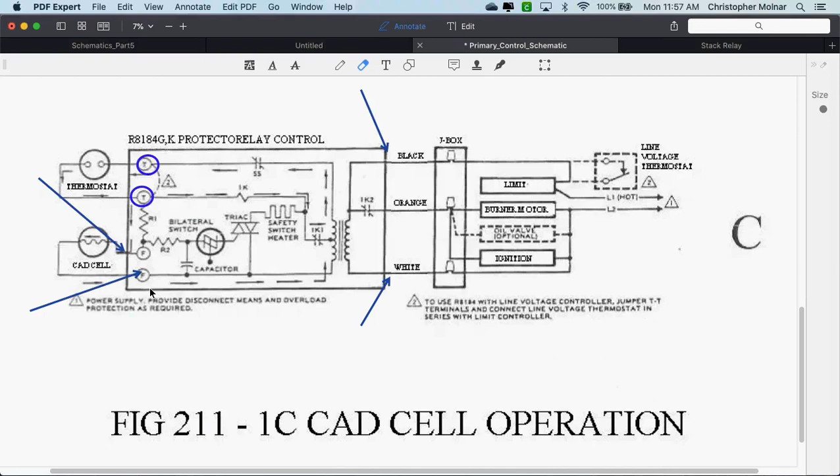I mean, can't you clamp your meter? Yeah, that's why in your meter bag, when you first got your meter, those two little clamps in there fit on the end of your meter leads. They either push on or screw on. I forget the types you have. That's what those little clamps are for. So you can keep your meter in a circuit while you're doing something else. Don't lose those two little clamps.

By the way, you can buy replacements of those on Amazon real cheap. I know this from experience. I leave them places, I don't know why. They fall off and I leave them places.

Okay, the other thing you can do, and we'll talk more about this when we're bleeding in oil, when we start talking about bleeding in an oil system, your little 3/8 inch open-ended wrench is the perfect size to fit and hold down on that FF terminal if you need to. The voltage is so low in here you don't have to worry about it. But we do that a lot when we're bleeding oil equipment out because you've got to keep it running and there's no flame.

Okay, so again, it's getting that jumper on there and keeping that jumper on there while the system is running, in order to make sure that you can still continue the flame process while you're doing your testing. You cannot have FF jumped when the system is starting. Cannot do it. And it will only last for the one call for heat. The minute this burner turns off, you've got to remove that jumper or it will never run again.

Now, having said that, what is a frequent callback for oil techs who go out and service oil equipment and the burner's running as they're leaving? Or leave it at FF connected. They've left their jumper on.

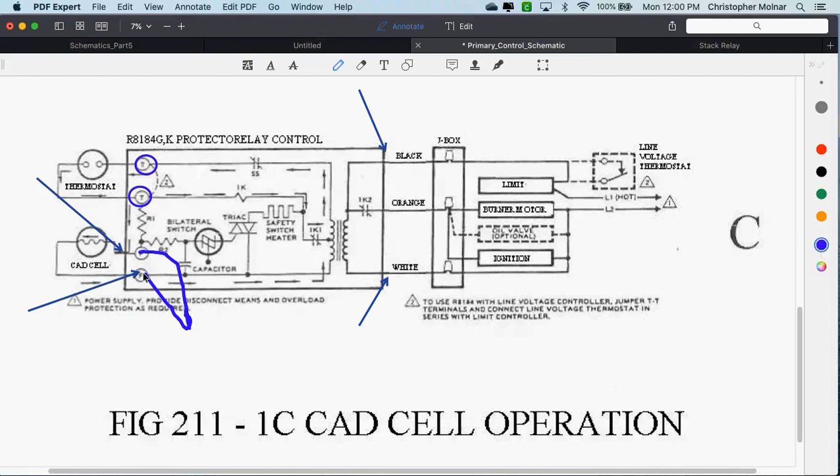Okay, that's why I always have alligator clips as well, because I never bypass a safety while I'm working on a piece of equipment without alligator clips. Because if I have alligator clips on something where I've bypassed a safety, I could tell the homeowner, just yank the wire off, yank the alligator clips off, everything will start working again. Because even the best technicians, you'll eventually get in a rush, and you'll leave that safety bypassed.

Any questions for me on anything we've covered today? Can't say I do. Anybody else?